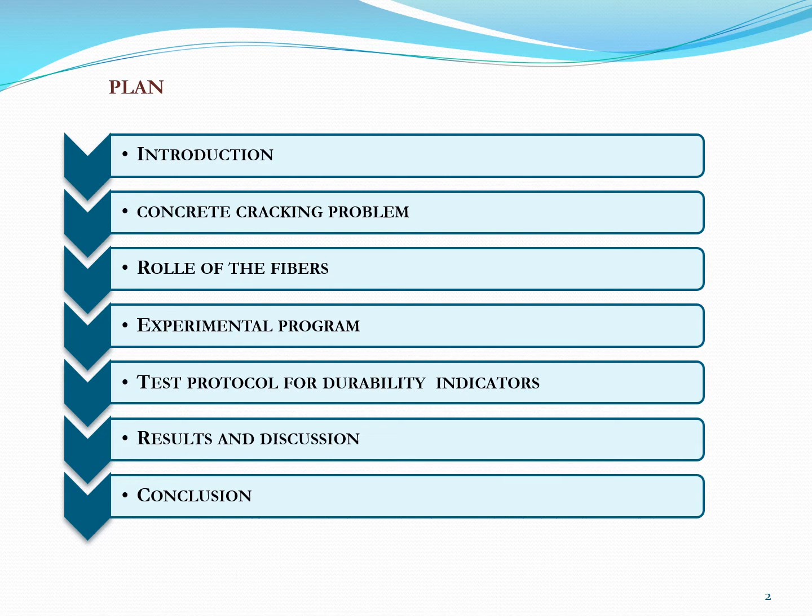Nowadays, the technique of adding fiber to a cement matrix constitutes an area to be explored in the field of materials reinforced with polymers in the field of construction and civil engineering. These composites are distinguished from other composite materials intended for industry and transport by the variety of types of materials and fibers, as well as the various types of additions, making possible a large variety of combinations or mixtures.

With the diversity of composite building products, it has become increasingly difficult to compare their properties and performance for construction needs or rehabilitation, which must meet several criteria and requirements: structural, thermal, economic, and environmental. Generally, the use of fibers, therefore, has an effect on cracking.

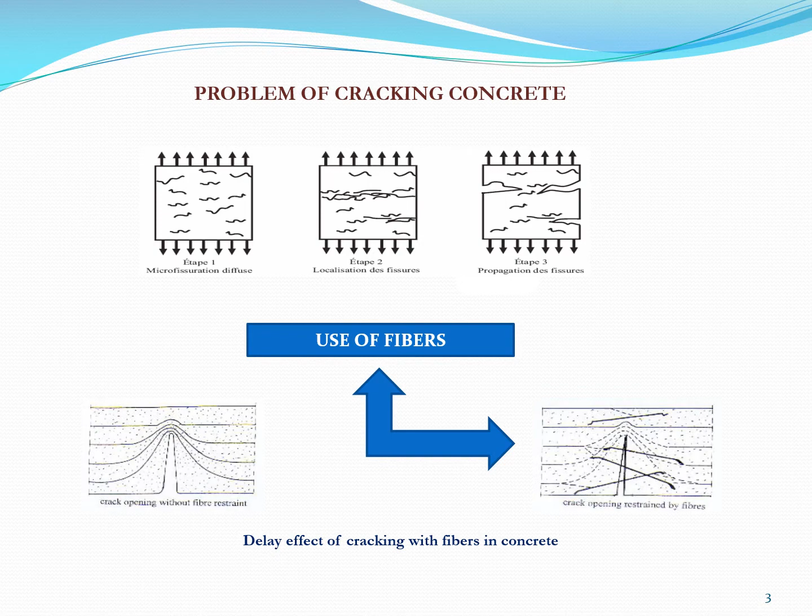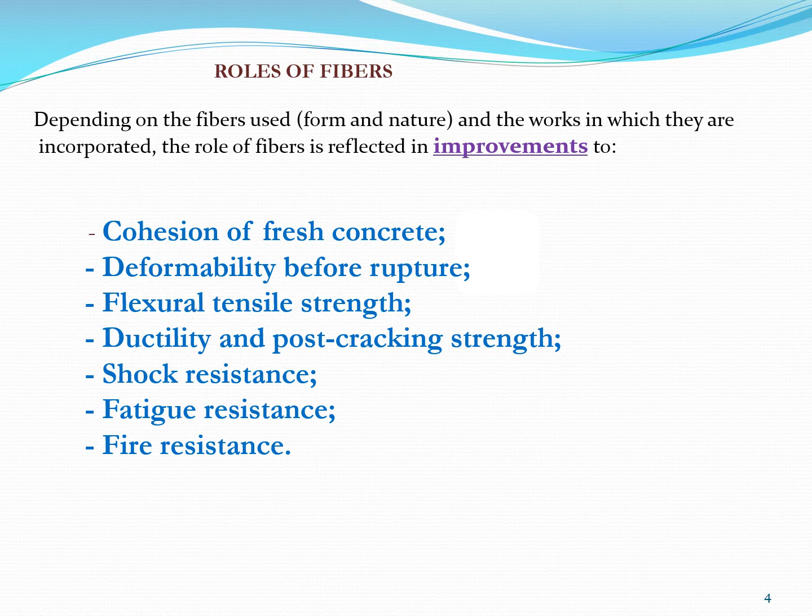Depending on the shape, the nature of the fibers used and their implementation in the matrix in which they are incorporated, the role of the fibers results generally in improvements in: one, the cohesion of fresh concrete; two, deformability before rupture; three, the flexural tensile strength; four, the ductility and post-cracking strength; five, the shock resistance, fatigue resistance and fire resistance. In our case, we will focus on the durability of composites with polypropylene fibers.

In this slide, I am going to talk about the materials and methods. In order to study the effect of polypropylene fibers on the durability of cement-based composites, several experimental tests were carried out in the laboratory. The composite was tested with different volume fractions of polypropylene fiber: 0.05%, 0.10%, 0.30%, and 0.50%.

The first component of the matrix is the sand, the normal sand. It comes from the quarry of the city of Kenitra in Morocco. Secondly, the Portland cement, a composite of class CPJ 35 as defined by the standard. The composition of the concretes used is a cement matrix made up of gravel 1 and 2 from the Kenitra quarry.

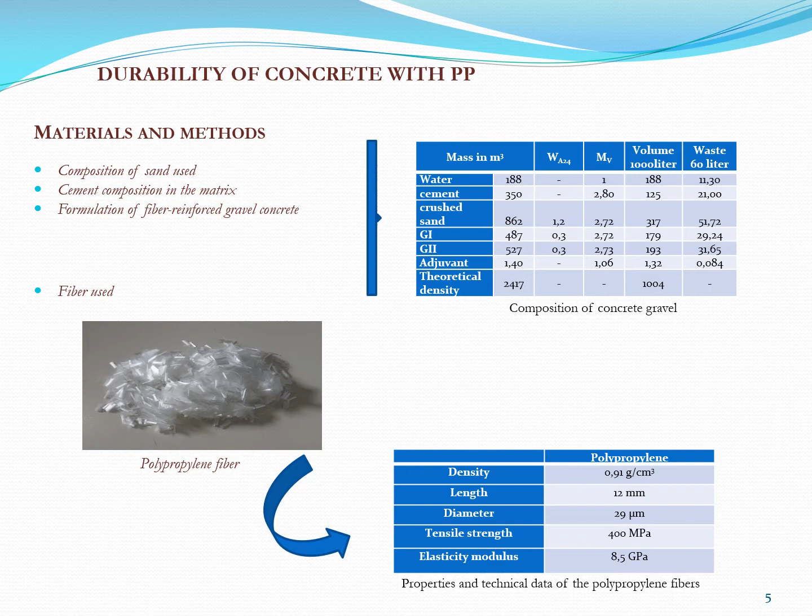In this slide, we show the experimental program. The experiments were carried out at the public testing laboratory. The standard specimens of 150 millimeters by 300 millimeters were obtained by mixing gravel, cement, and fiber in accordance with the standard. First, a raw concrete mix was prepared to be considered as the reference, as shown in the figure. The same composition was used for the concrete matrix in all mixtures with polypropylene fiber.

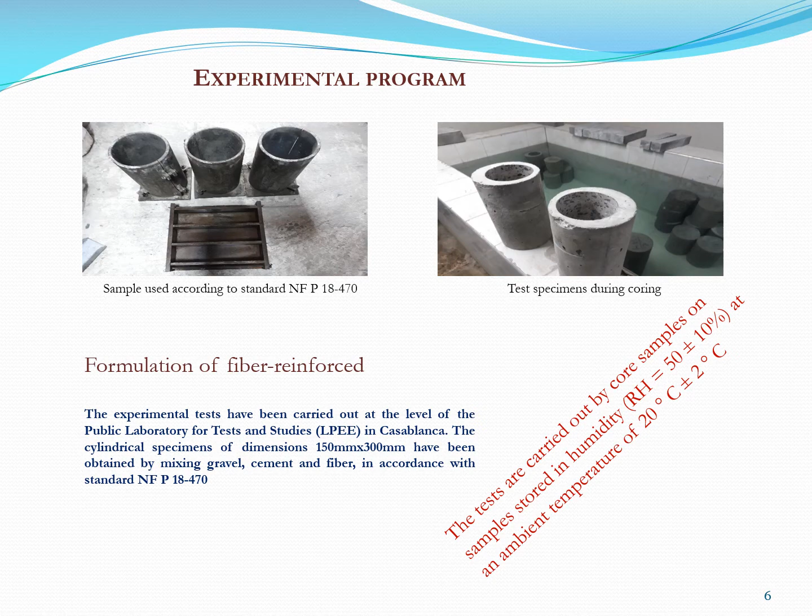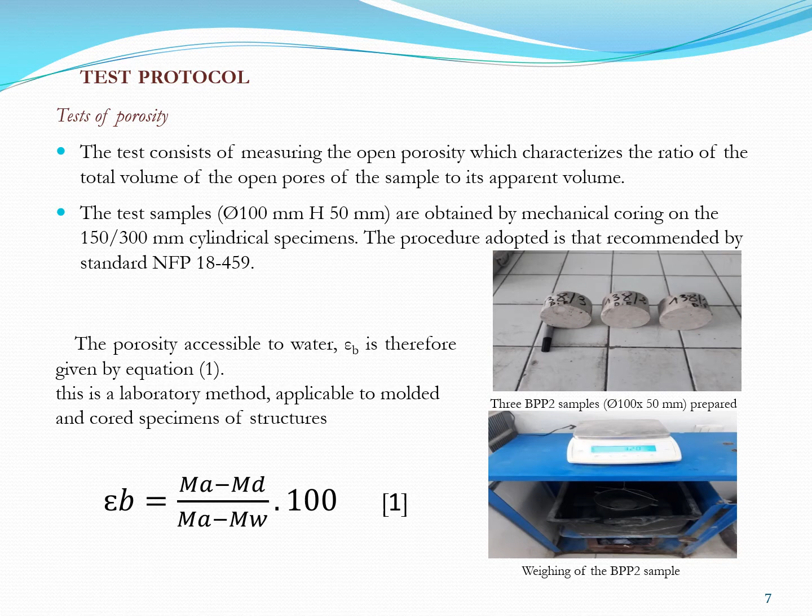For the test protocol, the porosity test consists in measuring the open porosity, which characterizes the ratio of the total volume of the open pores of the sample to its apparent volume. The specimens shown in the figure are obtained by mechanical coring on the cylindrical specimens. The procedure adopted is that recommended by the standard, and the test consists of weighing the samples in air and then in a liquid of known density.

The gas permeability test is carried out with the constant load permeameter recommended by Cembureau. Its purpose is to measure the oxygen permeability of hardened concrete test bodies. This is a laboratory method applied to molded and cored test specimens of structures within the limits of the dimensional tolerance imposed by the measuring cells of the device. The test consists in subjecting a cylinder specimen to a constant pressure gradient. The apparent permeability is measured according to the standard.

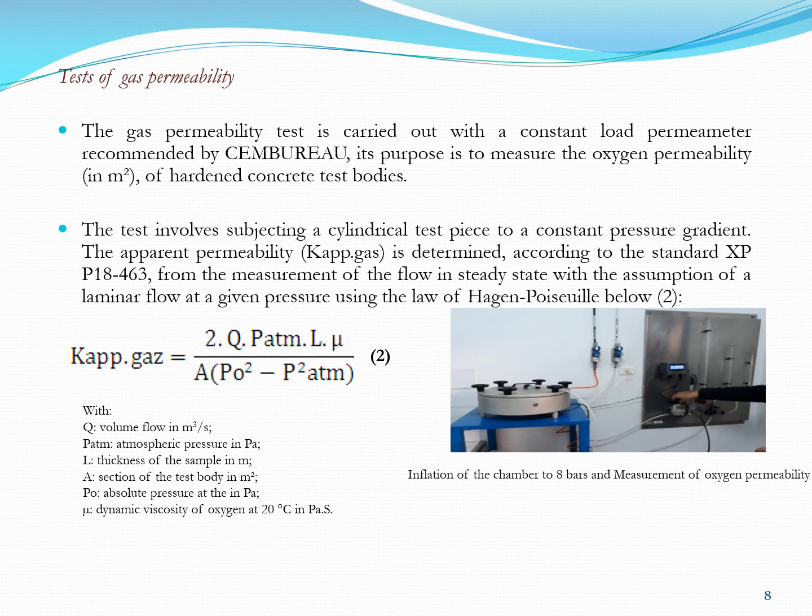For the diffusivity, the objective is to determine the diffusion coefficient of the chloride ions following tests in saturated conditions of migration under an electric field in non-stationary mode according to the French standard. At the end of the test device, the sample is cut parallel to its axis. The section is covered with the solution of silver nitrate in order to determine the depth of penetration of chloride ions.

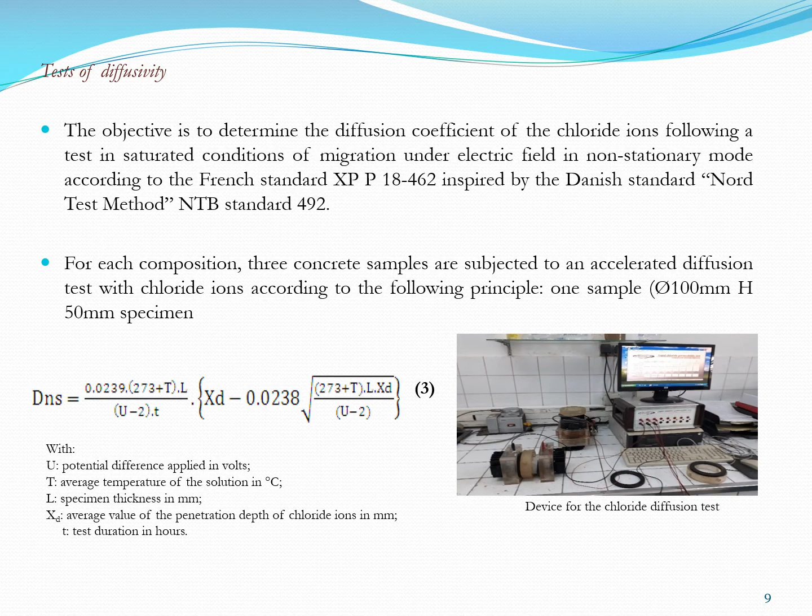In this part of results and discussion, I am going to talk about the effect of increasing percentage of fiber in the concrete on the durability indicators. In the reference state at 105 degrees Celsius, the porosity of the various non-fibrous and fibrous matrices is equivalent, of the order of 13.2%. With the increase in the dosage of polypropylene fiber, the porosity increased by 4.55% on average compared to non-fibrous concrete.

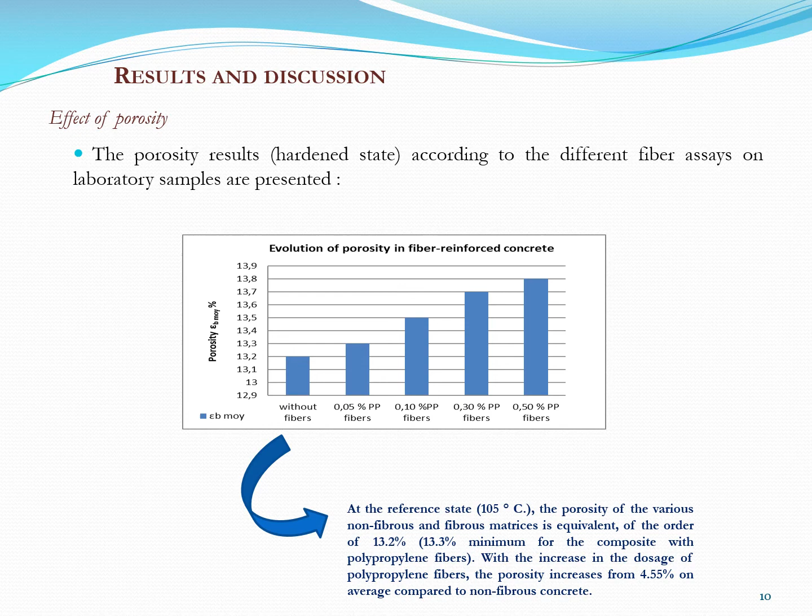In these pictures, we show the polypropylene fiber dispersed in concrete. So the accessible porosity of polypropylene fiber concrete increases with the percentage of fiber, which is explained by the fact that the adhesion between the polypropylene fiber and the aggregates forms cavities connecting to each other.

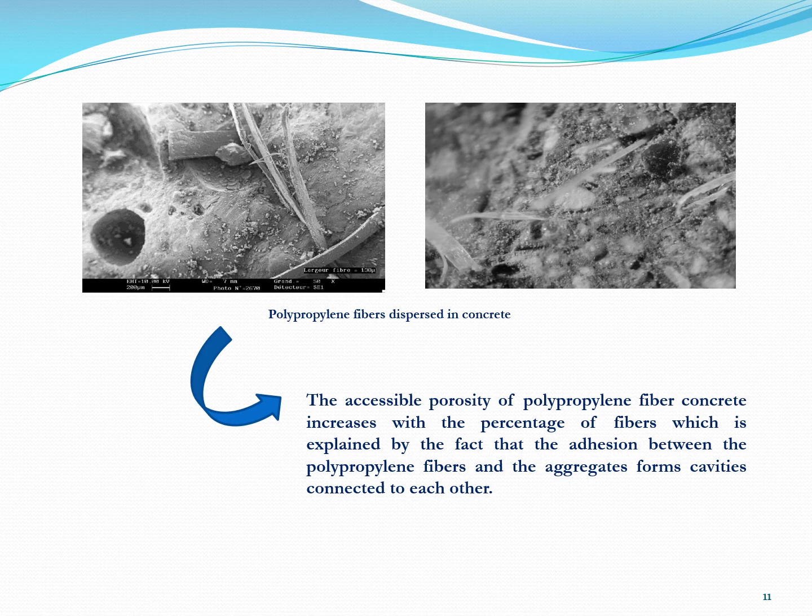The gas permeability of the various non-fibrous and fibrous matrices is equivalent, of the order of 97.3. With the dosage of polypropylene fiber of 0.10%, the gas permeability increased by 1.34% on average compared to the concrete without fibers, as you can see in the figure.

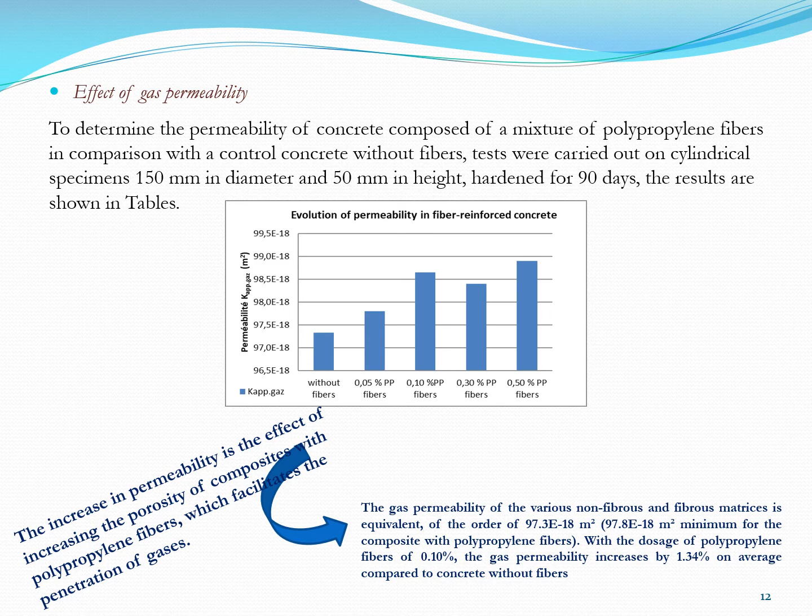For the effect of polypropylene fibers on the diffusivity, the chloride ion penetration tests in the samples of the different polypropylene fiber matrices show that there is a little difference compared to the control concrete without fiber. As with the permeability, there is a slight increase in diffusivity with the dosage of 0.10% polypropylene fibers, approaching 7.25% on average compared to non-fibrous concretes.

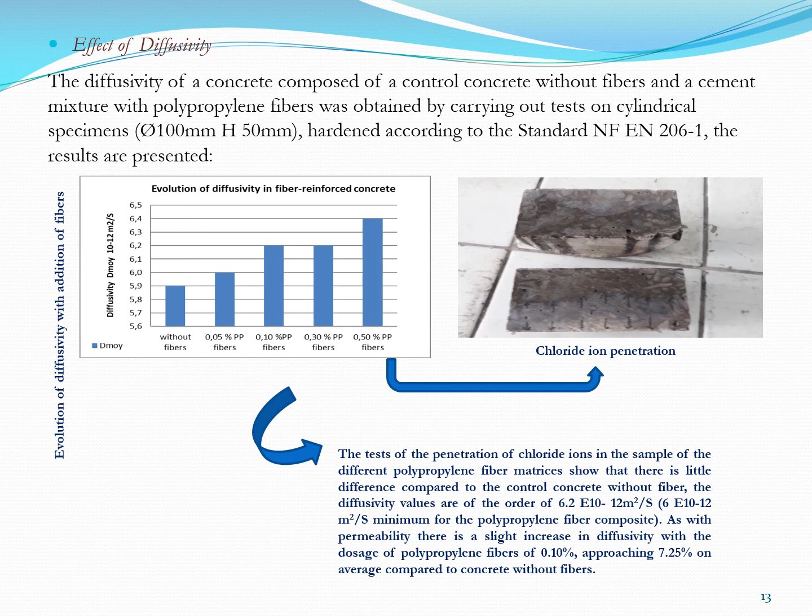For the effect of PP fibers on the fire resistance, the objective is to study the effect of polypropylene fiber on fire resistance in concrete. The concrete mixes are prepared using volume fractions of 0.10%, 0.30%, and 0.50% polypropylene fibers. In order to take into account the accuracy of the test results, 3 tests were prepared from each group of concrete mixes. All were maintained in standard cure for 28 days. After the curing period, samples of each group were exposed to 300 to 600 degrees Celsius.

For different temperatures, the composite with 0.50% fibers exhibits the least loss in compressive strength. This loss is increased at 6 hours of exposure for the two temperature ranges. In the case of concrete with polypropylene fibers, the fiber melts at 160 degrees Celsius, creating voids in the concrete. Vapor pressure is released in the newly formed voids, and explosive spalling is greatly reduced.

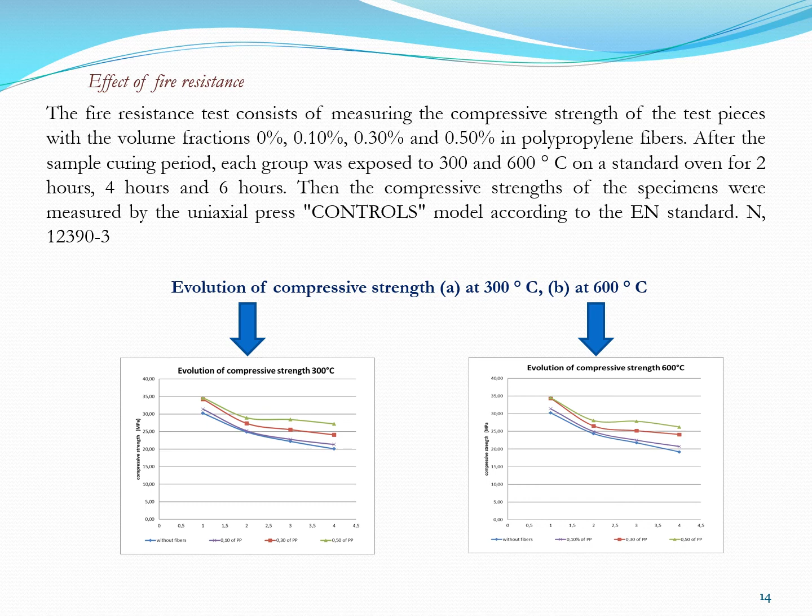Here we show the fiber-reinforced concrete specimens before and after being exposed to 600 degrees Celsius, for the range of 0.50% fibers in the concrete. The maximum compressive strength at 23 degrees Celsius was determined for the 0.50% polypropylene fiber composite, and this increase was approximately 14% compared to the non-fiber control concrete samples for all ranges of temperatures.

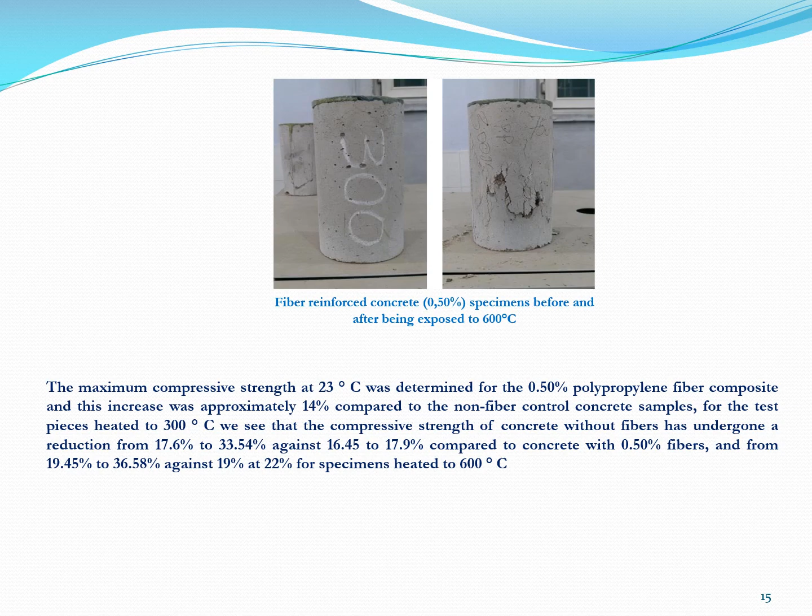As the conclusion, the durability was treated using the major indicators. The analysis of the results obtained places the polypropylene fiber concrete in the same class as ordinary concrete. Secondly, the inclusion of the 0.50% volume fraction of polypropylene fiber in a cementitious composite gives significant results in terms of reducing compressive strength loss for a temperature range of around 300 degrees Celsius.

On the other hand, the use of polypropylene fibers in cementitious composites increases their performance in terms of fire resistance and can find better development and application in the civil engineering market in addition to its ductile nature.